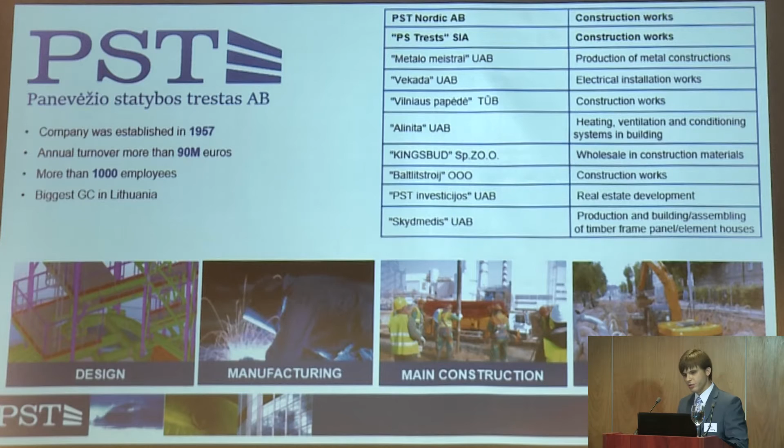Here's a range of projects PST is involved in. As I said, from residential houses, then commercial buildings, public buildings, culture, heritage. By the way, PST accomplished one of the iconic projects in Lithuania. It is in Vilnius, called the Palace of Great Dukes. So if you will be in Vilnius, please visit it. It's a very interesting object to visit.

Also, we do a lot of infrastructure constructions and industrial projects, also big scale industrial projects. By the way, almost all the biggest projects of PST were nominated for Product of the Year and won some gold medals. So it speaks for itself.

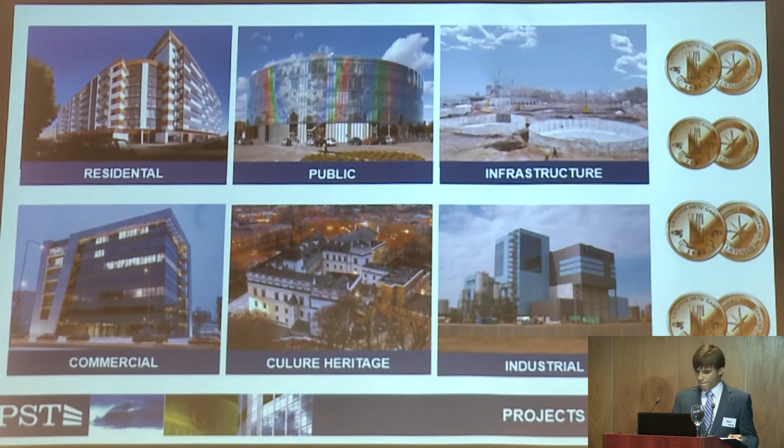Now about design. I want to talk about the design department, PST projects. First of all, I'm working in it, so it's the main reason. And the second reason is that the whole PST way to BIM started here, from design.

So some facts about PST projects. It was established in 2001. Currently we have 35 specialists working, more than 35 now actually, and our annual turnover is more than 1.5 million euros, so quite enough. Also you can see our services, what we are providing. I highlighted BIM. We are at least trying to do what we can to implement BIM, to make all our projects one way or another BIM.

Here you can see on the right side our software package. I think the main program is Tekla Structures. Also we have ArchiCAD and DDS-CAD, and also some Autodesk products.

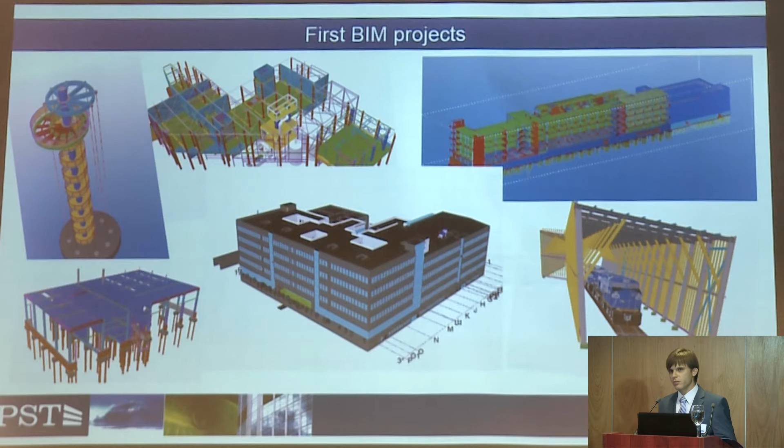our first BIM project, first project with Tekla, was Silos Towers. It's for biofuels, meshed wood. Here we have 2 disciplines: technology and the structural part. We combined this together, and you can see the result, how it looks in reality, and how it looked before in our model.

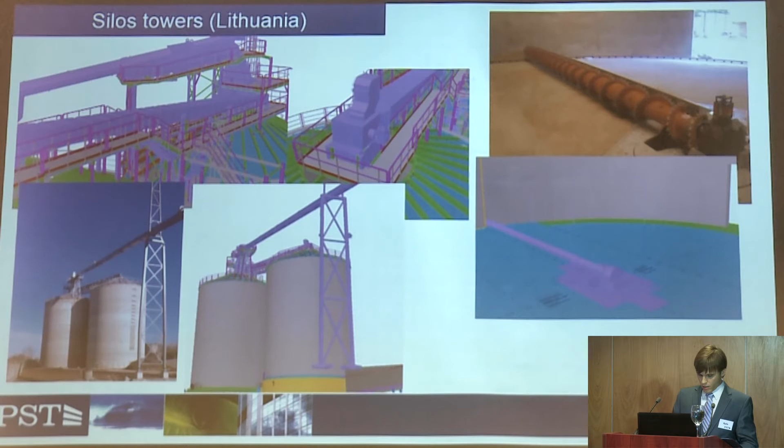Yeah, the next project is a police headquarters in Lithuania, in Klaipėda, our harbor city. Here we also have two disciplines: the ventilation and air conditioning part, and the structural part made with Tekla Structures. By the way, the ventilation and air conditioning part was made with DDS-CAD. So you see the result here.

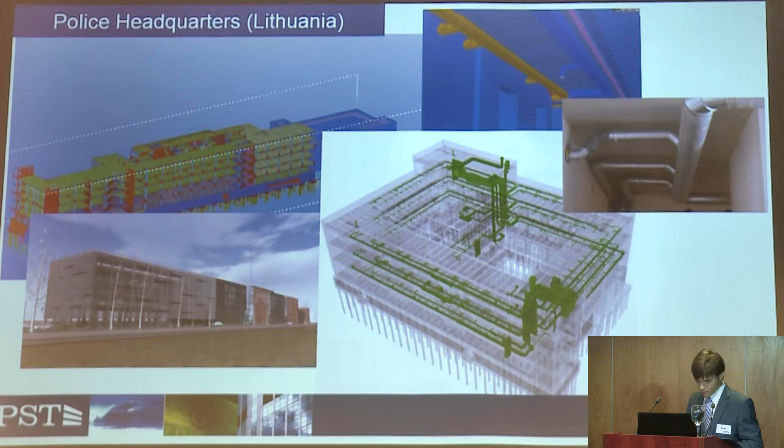One more of our projects. This was done for a Norwegian contractor. Here we have a technology part and a structural steel part. We have been detailing steel and sending drawings and fabrication files to our steel fabricator Metalo meistrai, I mentioned it before. Yeah, NC files for plates, for plasma cutters. So we have a partial connection to the workshop, let's say.

And one more interesting thing about this project: there in Norway, they didn't use any general arrangement drawings or assembly drawings, because they assembled all the steel using only the model and Tekla BIMsight. So it's quite a good achievement, and people on site were very happy about that, as far as I know.

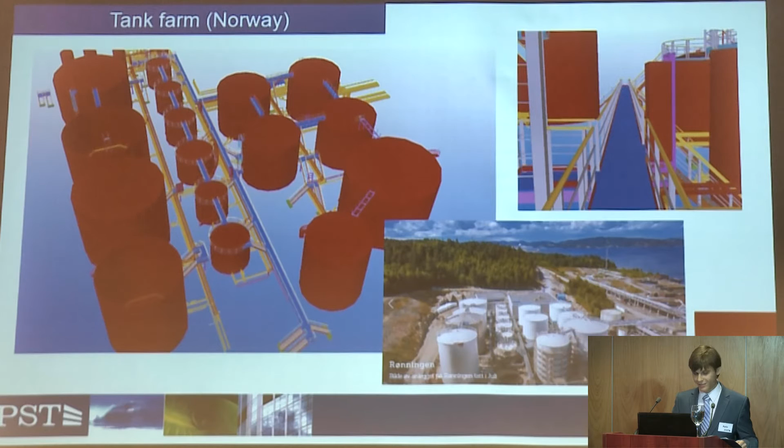Yeah, so next, I want to talk more about this project. In this project, we combined all parts in one model. Here we have everything modeled and combined in one single model, and this model is used in design coordination and on the construction site on a daily basis. This project is called Joint Center for Life Sciences. It will be part of Vilnius University when it is finished next spring.

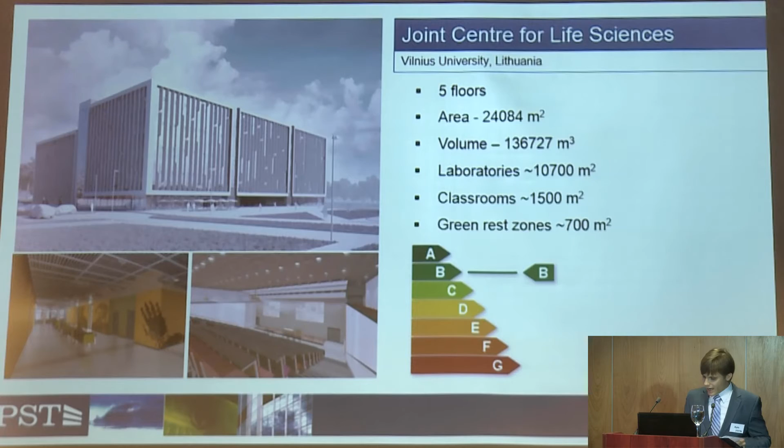Some facts about the project: it's a 5-floor building, area more than 24,000 square meters, volume of course, and I want to highlight one number: laboratories. You see, almost half of the whole building is dedicated to laboratories. Why do I highlight this number? This leads to a very difficult MEP part, because laboratories need special treatment for air, for microclimate.

So for this project, in our way of thinking, we decided that the only solution is to go for BIM. In other words, virtual design and construction.

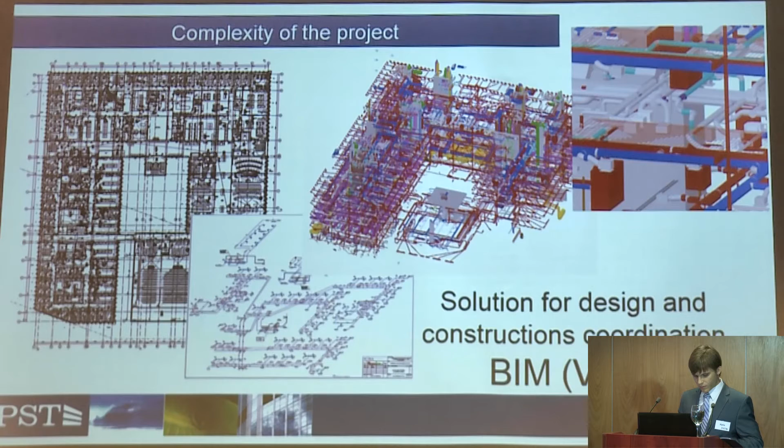So here I showed our workflow of working with BIM. We had a lot of subcontractors on this project, and we established a BIM server on which every party updated their own parts and got updated information from the other parts. We also created access for our guys on the construction site. They also use these models for visual information and for work coordination. I'll talk about this later.

And one more interesting fact about the early stages of the design of this project: we tried to use a Smartboard for design coordination. If anyone doesn't know Smartboard, it's like a 2-meter-wide iPad hanging on the wall. So it was kind of a fun way of using it.

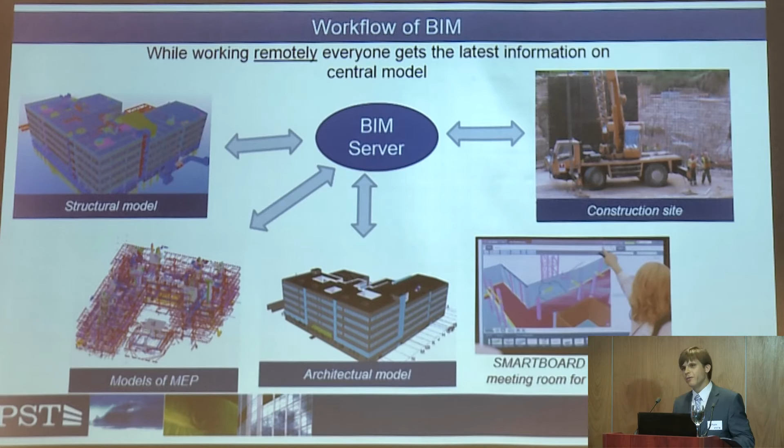Yeah, so about the models. The architectural model was created with AutoCAD Architectural by our partners. It's a good model for working, because we used this architectural model for some quantity takeoffs. For example, we counted windows and doors of a particular type, or we needed to calculate the area of the walls

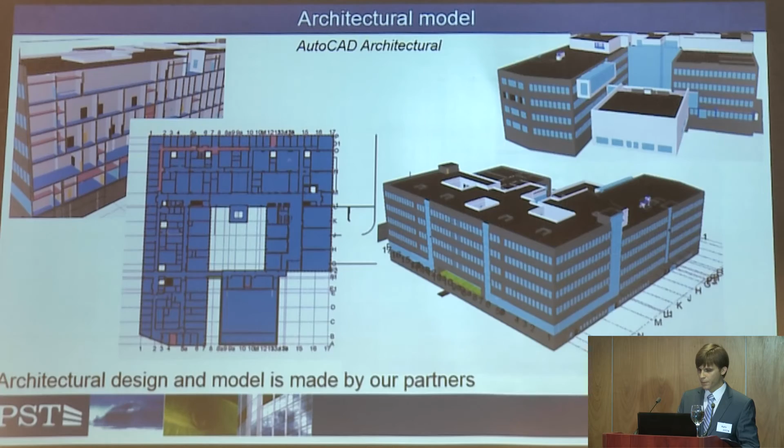and distribute this area into segments and tell our subcontractors how many square meters they should build on site. It's for controlling them. So we did some takeoffs from this model. Then the structural model. All credit goes to PST Projektai.

We designed it, detailed it, so every single detail is in it. And also one interesting fact about this structural model: we worked together with Markučiai. I don't know if you know it. It's the biggest precast concrete elements manufacturer in Lithuania. We worked together with Markučiai's design department called Concretus Designers, and they were reinforcing all precast elements.

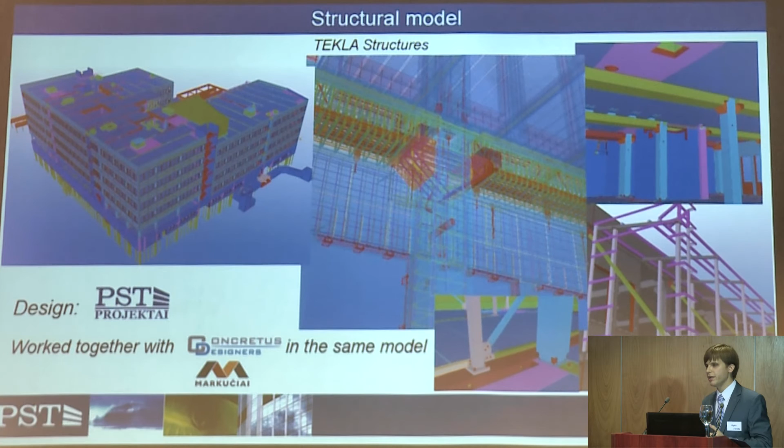We did all the geometry, for example, for a precast wall, let's say. We put all the embeds, all connections, and simultaneously in the same model, Concretus Designers was making reinforcement, making workshop drawings, sending them to the workshop and delivering production on site. So in this way of working, we eliminated the overlap between two design teams. So we saved money and time. In other words, we have a direct link to manufacture. This is good.

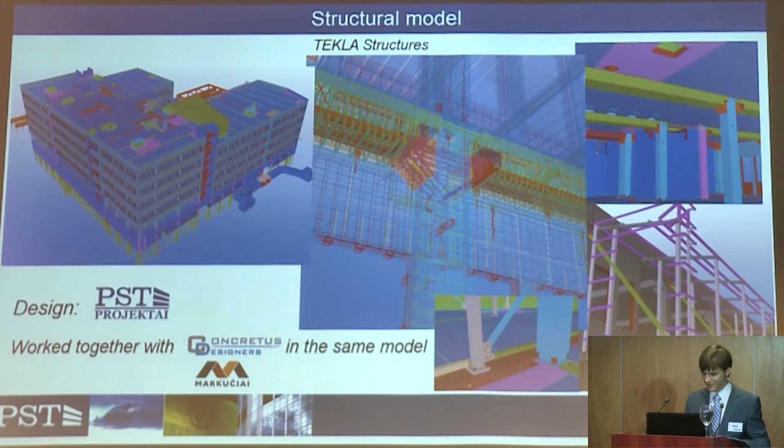And next, about MEP models. They were made with a variety of programs. You can see DDS-CAD, MagiCAD, Revit MEP, AutoCAD MEP, and we combined them in one single model. We used those models for clash detection, for visual information, for coordination.

And the great tool for model reviews, especially on this project, was Tekla BIMsight, a free product. We used it for communication, coordination of works, especially at early stages of the design and on the construction site. It's a very useful tool on site because you can do communication, let's say, through Dropbox directly in the model. Very good and useful tool.

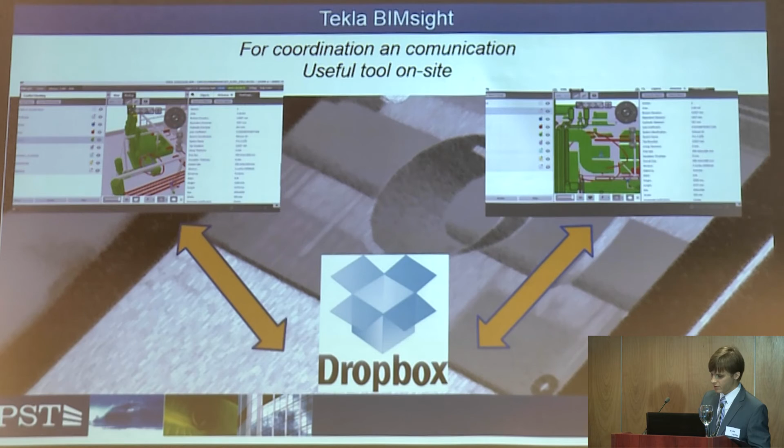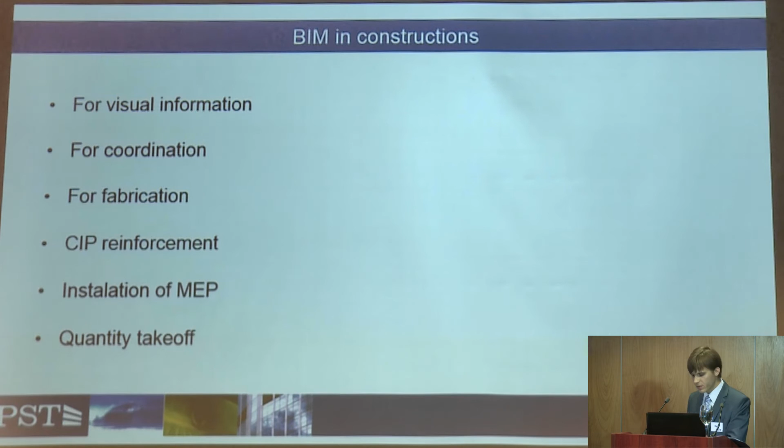Yes, so how do we use BIM in construction? First of all, it's for visual information and for coordination. In our biggest projects, we have powerful workstations, which allow us to open large BIM models, combined BIM models, to rotate them, pan them, zoom in, zoom out, whatever.

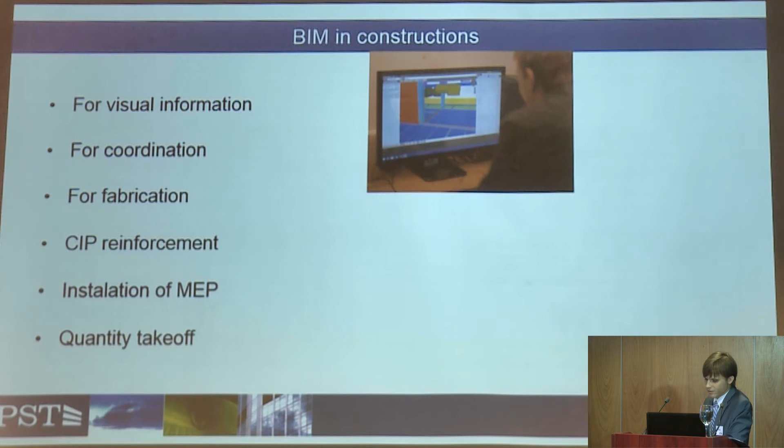Next, we use BIM for fabrication. As I mentioned before, we are working with Markučiai. We have a direct link through the multi-user feature. Also, we used it for our cast-in-place concrete reinforcement. We sent models of cast-in-place concrete to our crew on site, and they used them for telling workers how the reinforcement should be laid out, how everything should be accomplished. So it was very useful, as far as I know. I was speaking with some site managers. They told me that it's a very good way of working.

Also, we used it, and are using it continuously, because the project is going on. It will be finished next spring. So we are using it for installation of MEP, for installation coordination, let's say, to see how it will be installed, what should be installed, the sequence of installation. And of course, as I mentioned before, we use it for some small-scale quantity takeoffs.

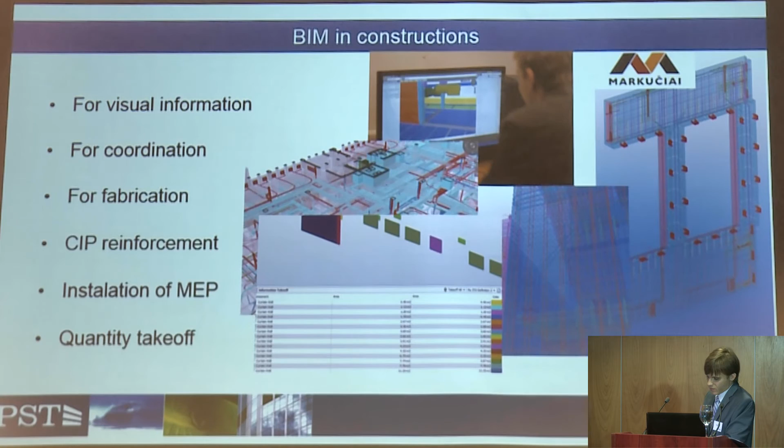Now, about benefits, what we get from BIM and what lessons we learned. So, benefits. If you read some articles about BIM, I think most likely you will find those benefits. But these benefits are what we saw from our point of view, and they're real. So it's better communication. Communicating through the models is always better than using 2D. I always say that. Less mistakes on site.

It's kind of a relative thing, but in the design phase, we found some clashes. We found some things that went wrong in the design phase, and we remodeled that, redid that, and so this leads to less mistakes on site. And, of course, quicker work. Working with models is quicker than taking a bunch of 2D drawings and trying to find something that someone drew. So it's definitely quicker work.

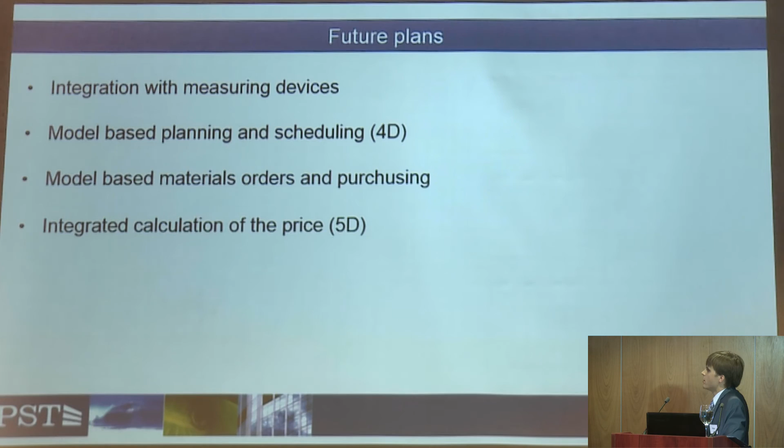And now about our future plans. First of all, we want to integrate our Tekla model with measuring devices, direct integration with, for example, Trimble devices. Sorry. Yeah, we want to improve the quality of our construction and to have as-built models. Also, next, model-based planning and scheduling.

We want to link our models to time, to get automatic schedules, and maybe as a next step, planning of the whole construction process, for example with Vico software. And then model-based material orders and purchasing.

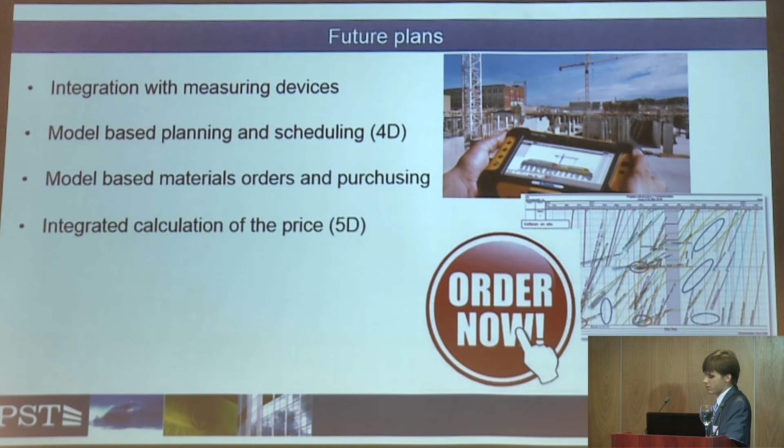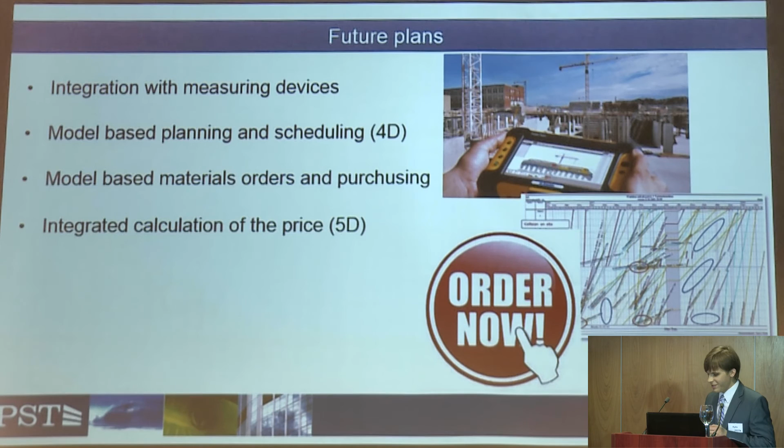We want to make automatic quantity takeoff and link it to our order templates, so that people on the construction site can, just by clicking a few buttons, order the materials or elements directly, in a more automatic way, let's say. And of course, we would like to integrate price calculation into our BIM process.

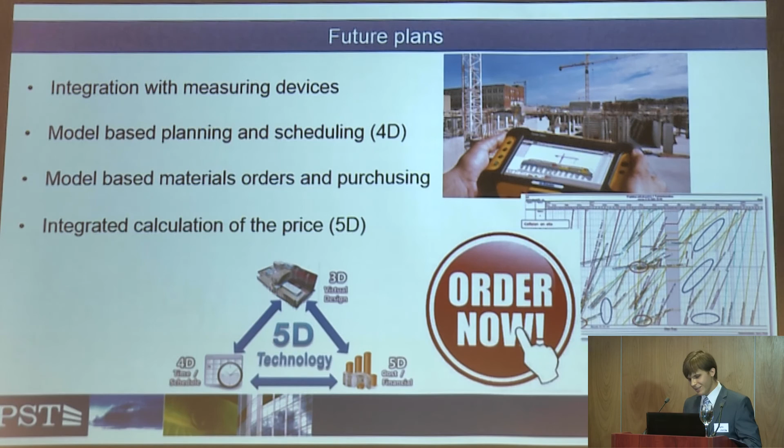I think it's a very good feature to calculate price from the model, and in fact we have very good conditions for that, because we have a whole chain of processes in PST from design to manufacturing and construction site, so we can test this to work correctly. And I think we will do this, maybe not next year, but in 2 years.

So that's the end of my presentation. Also, I would like to show you a live demo of the model if we have some time. So maybe any questions for now?

I have one question. You said that all these different MEP parts were drawn with different software systems, like ArchiCAD, Revit, and others. So what challenges did you have when you had to integrate all these models from different subcontractors and different software into one model? Can you talk more about that?

Actually, we had some issues with MagiCAD. DDS-CAD, Revit MEP, even AutoCAD MEP were quite good. But talking about MagiCAD, our subcontractors who were working with MagiCAD firstly couldn't import IFC from other parts, like architectural or structural, and also they couldn't export the IFC file correctly.